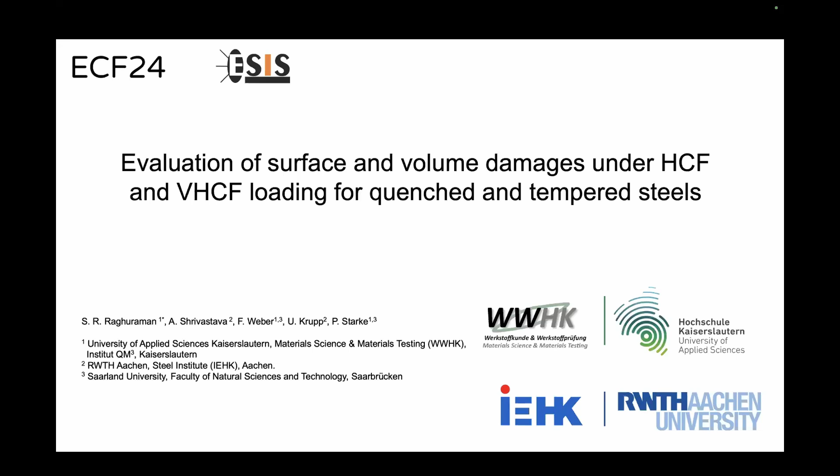Today my topic is about evaluation of surface and volume damages under HCF and VHCF loading for quenched and tempered steels. First, let me talk about the aim and the motivation behind the project.

Then I'll move on to the experimental setup and the methods that we have used. Then I'll discuss in detail about the experimental results. And at the end, I'll summarize all the points to give you an overview.

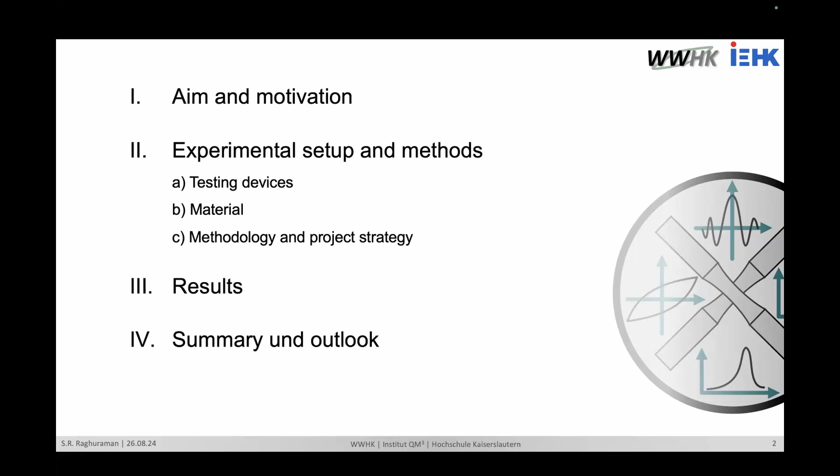According to the International Energy Agency, the steel industry is a major contributor of carbon footprint, accounting for almost 7% of global carbon dioxide emissions. Thus it is really necessary for us to promote sustainable engineering practices.

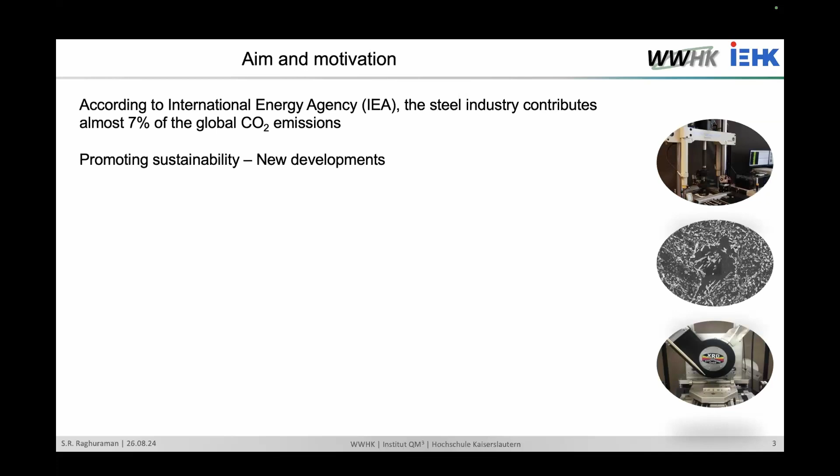We can do that by introducing new developments in material science, by developing new methods in engineering practices and so on. There are many approaches to sustainability.

This is the first model, 3R, a very classic model that we are all familiar with: reuse, reduce, and recycle.

Another similar one is circular economy. Here we are talking about slowing down the material flow by designing longer lasting products.

Next we'll move on to narrowing the material flow by using lesser material through lightweight constructions, for example. Then we'll try to avoid scrapping of materials and reintroduce it back into the material flow, thus closing the material flow.

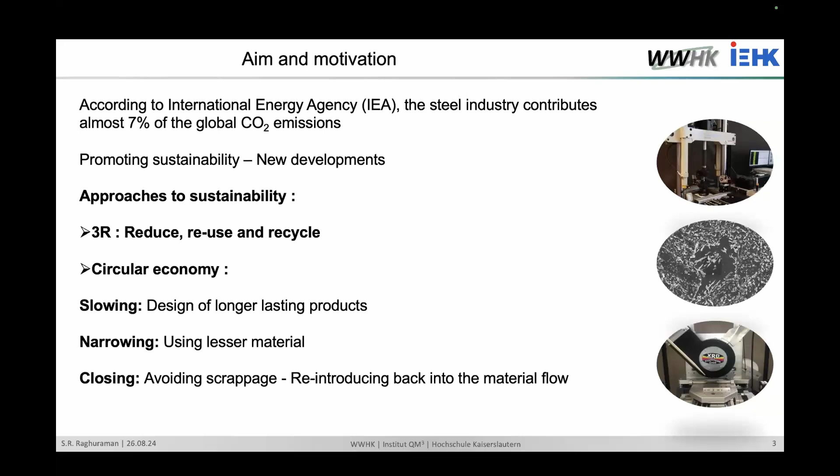So let's imagine a scenario. I have a product or a component that is partially damaged, not 100% damaged. What if I want to use it again?

What if I do not want to go through the process of melting it and then investing money, time, and energy in it, or scrapping it altogether? What if I can just reuse it? That is where reuse comes into play.

This reuse approach is an excellent opportunity for material resource management. This is very relevant for us because scrapping usually occurs even though the end of material integrity is not reached.

There's also problems with recycling. The steel industry is already saturated at 30% recycling of damaged products, and we also have economical and ecological issues, because for example accumulation of precipitates, such as copper, is an issue in recycling.

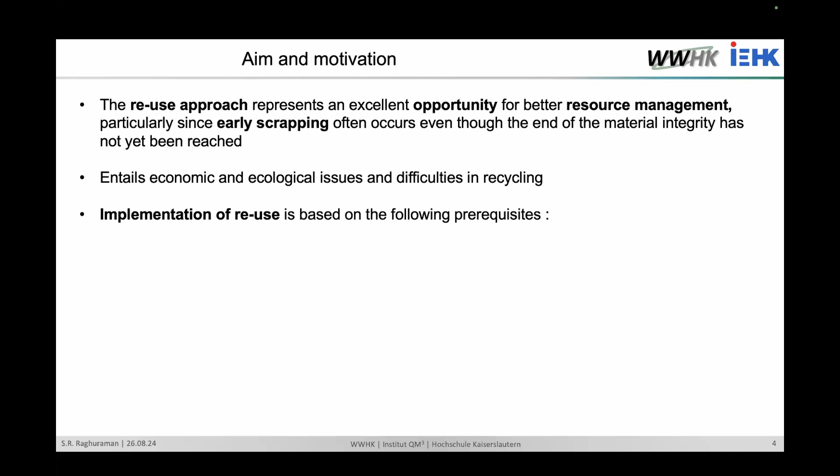So how to implement reuse? We need to take into consideration the following prerequisites: selection of relevant material areas. What is most relevant to me? Is the surface more relevant, or is the volume, for example?

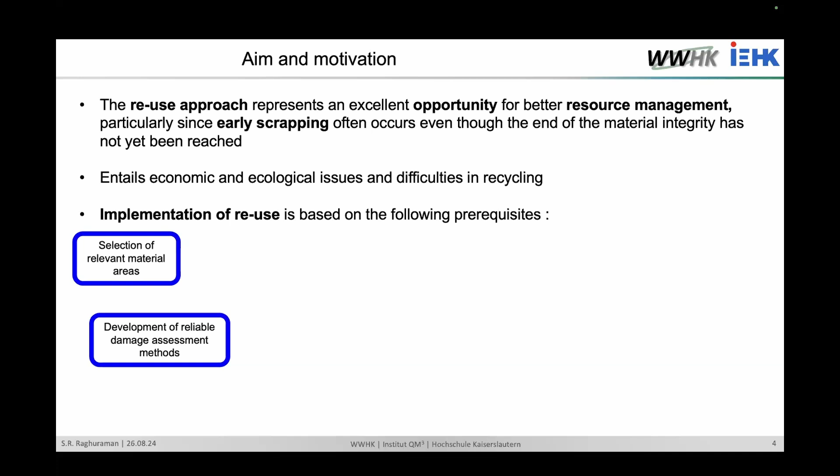Then development of reliable damage assessment methods. How much damage has occurred, and how can I make sure that the damage is there? And how can I quantify the damage?

And development of reconditioning methods. How can I remove the damage so that I can reuse it again?

And determination of reuse potential: how much lifetime I can make use of after reconditioning.

I also take into consideration the influence of size, geometry, and frequency effects, and of course the statistical models as well. I also have to take into consideration the fractography, the damage mechanisms, and crack modeling.

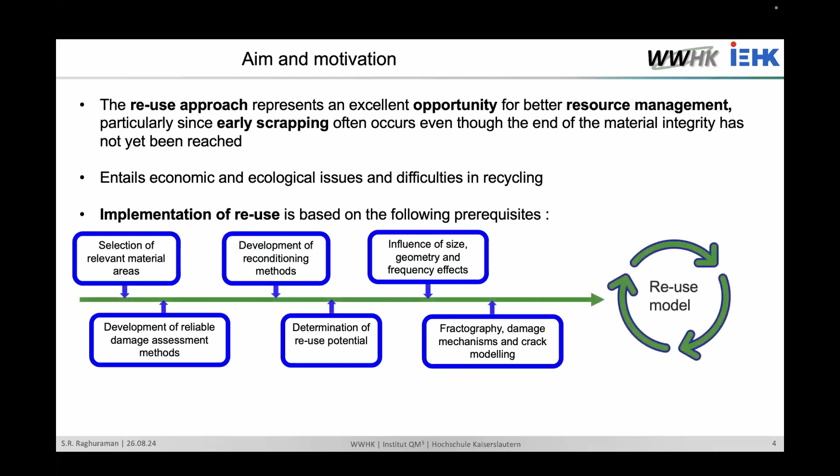What if I can put everything together in a model? This model is actually the main goal of our project: the identification and resolution of these prerequisites. We are trying to develop an encompassing model, which is our primary goal.

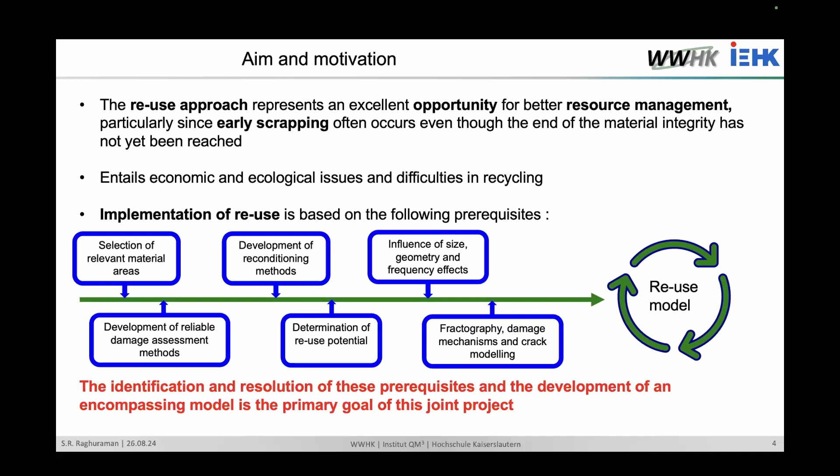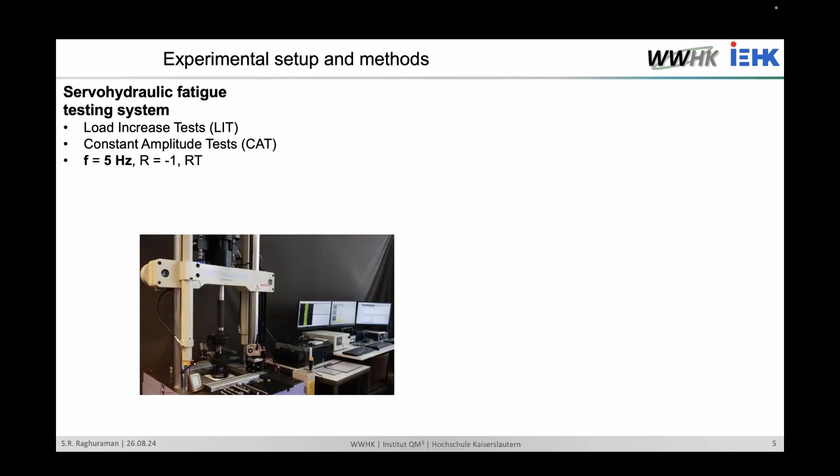For the experimental setup, we have used a servo hydraulic fatigue testing machine from Shimadzu. Here we have conducted load increase tests as well as constant amplitude tests at 5 Hertz and a load ratio of -1 at room temperature.

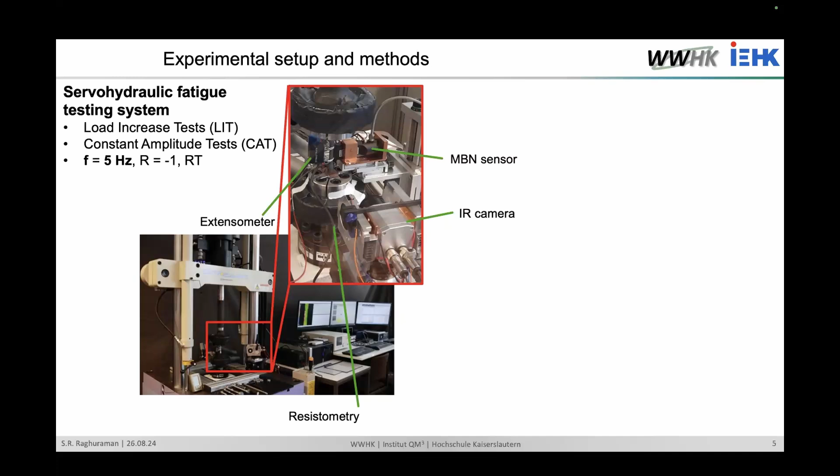To monitor the fatigue behavior during the experiments, we have used extensometer, resistometry for measuring the change in resistance, magnetic Barkhausen noise sensor for magnetic aspect, and IR camera for thermography.

For the next set of experiments, we also used a resonator from Rosenberger. Here we conducted constant amplitude tests at a load ratio of -1 at a frequency of 260 Hertz at room temperature.

The material that we have used here is quenched and tempered SAE 4140 steel. It is widely used in automobile components like crankshafts, gears, and so on.

It was heat treated at an austenitization temperature of 860 degrees Celsius, then quenched, followed by a tempering process at 550 degrees Celsius for 120 minutes. That is how we get the mechanical properties and chemical compositions listed here, tabulated here.

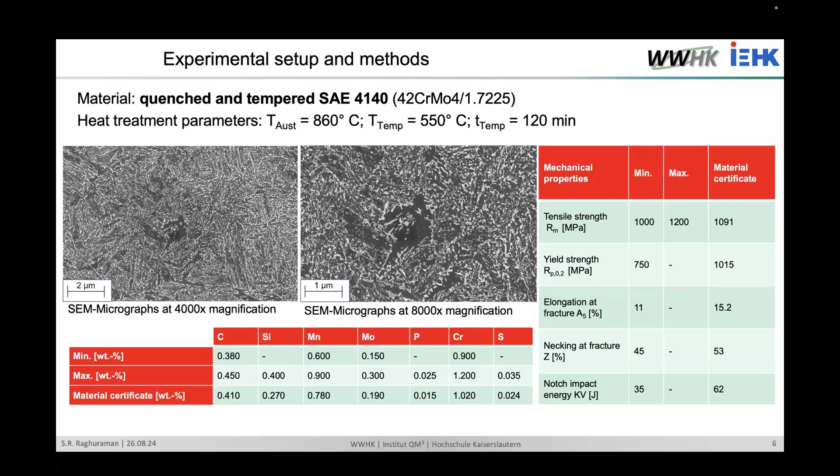The result is a very typical tempered martensite microstructure that we can see in the micrographs. So our project strategy is to start with...

...generation of the SN curve using a method called the stress-life method, and then we define the pre-damage amplitudes at the point till which I can damage it partially. Then we conduct pre-damage experiments in the HCF region until half the lifetime.

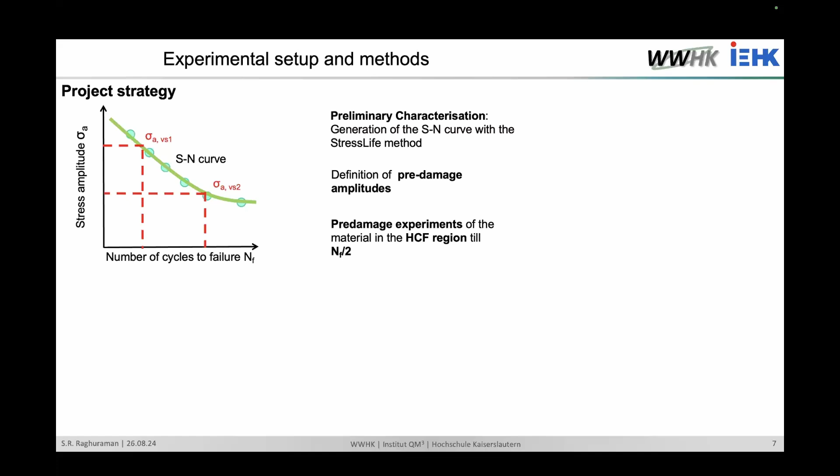After pre-damage experiments, we monitor the damage. We try to quantify the damage using NDT as well as microscopic investigations.

Then we think about reconditioning the material, that is, removing the damage that we have introduced. This is done here: the surface damage is removed by fine turning and polishing. The next step will be mixed HCF and VHCF loading of the reconditioned material.

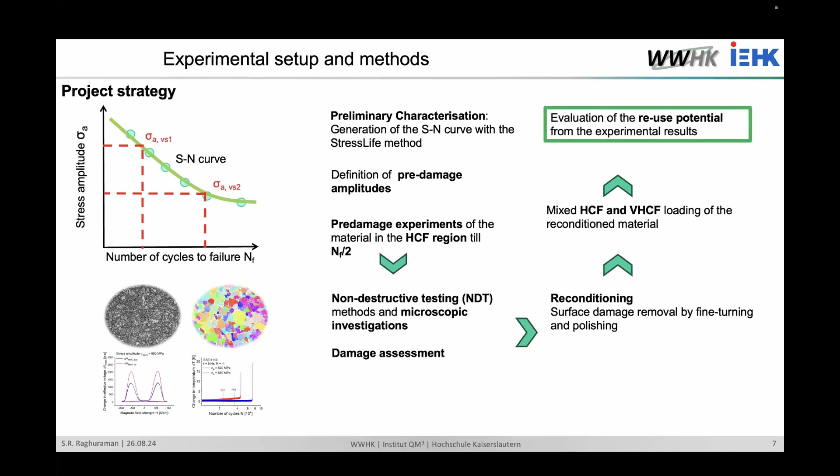At the end, we will be evaluating the reuse potential from the experimental results that we have obtained. So I talked about the stress life method. I'll go through it again very briefly.

Stress life method is implemented with a combination of Morrow, Coffin-Manson, and Basquin relationships. We'll conduct one load increase test and then two constant amplitude tests, and put the data together in a Morrow equivalent plot. Then the next step will be visualization of the material response against the number of cycles to failure. We'll take the data so far and use it to calculate further coefficients and exponents needed for calculation of the stress life curve.

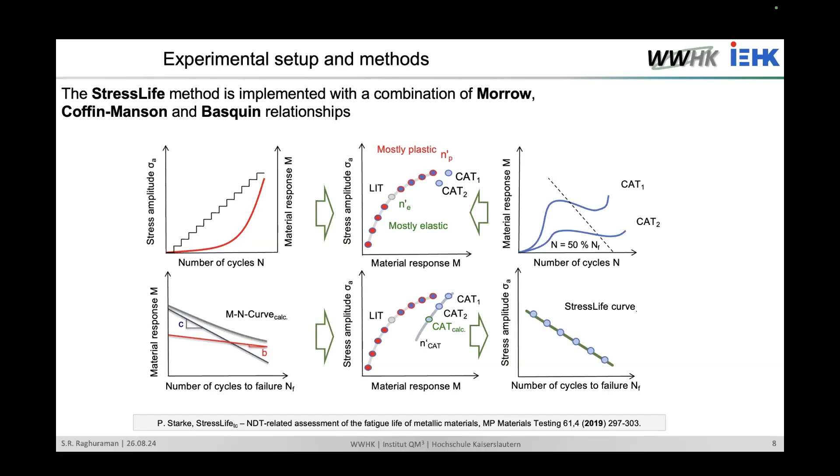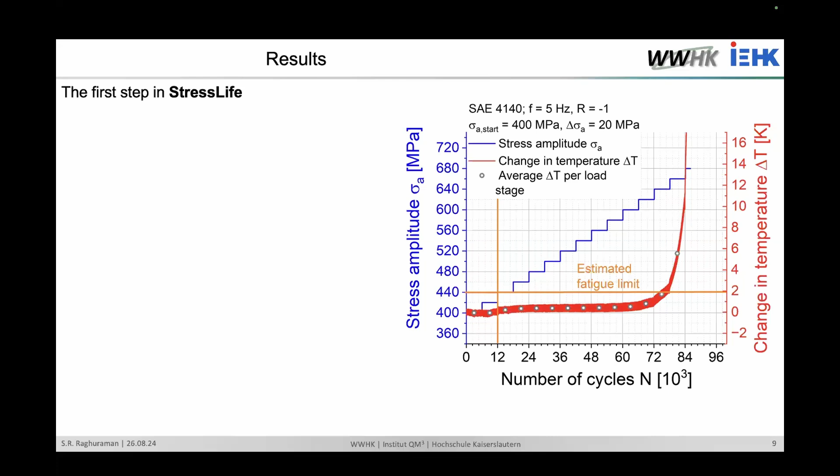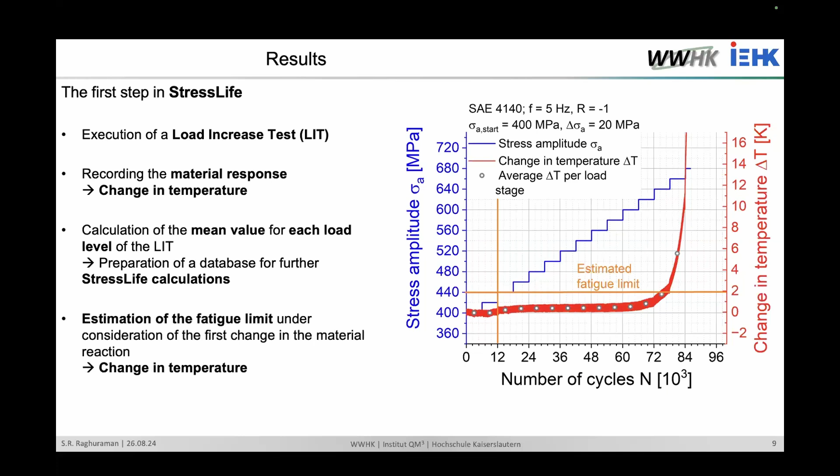The first step was to conduct a load increase test, starting at 400 megapascals and increasing 20 megapascals for each step, with a duration of 6,000 cycles per step. For simplicity, I've used thermal data to represent the cyclic deformation curves. Here we have a slight increase, the first considerable increase, which we consider an estimation of the fatigue limit. We've taken the data for each load step, and we'll use it in the steps to come.

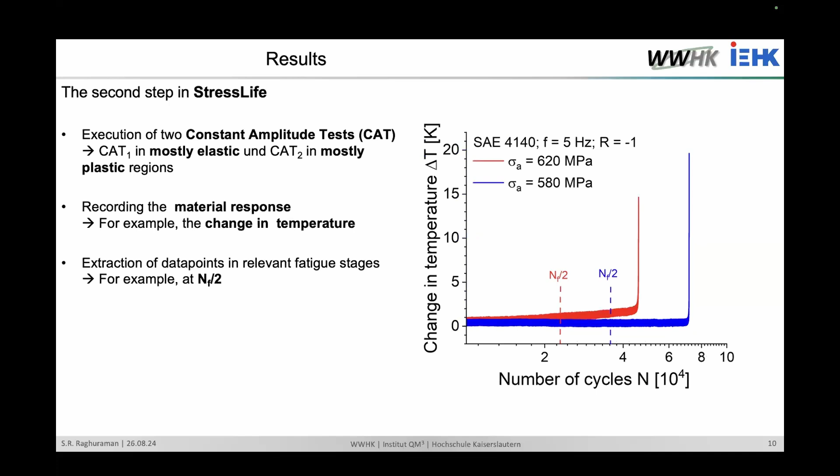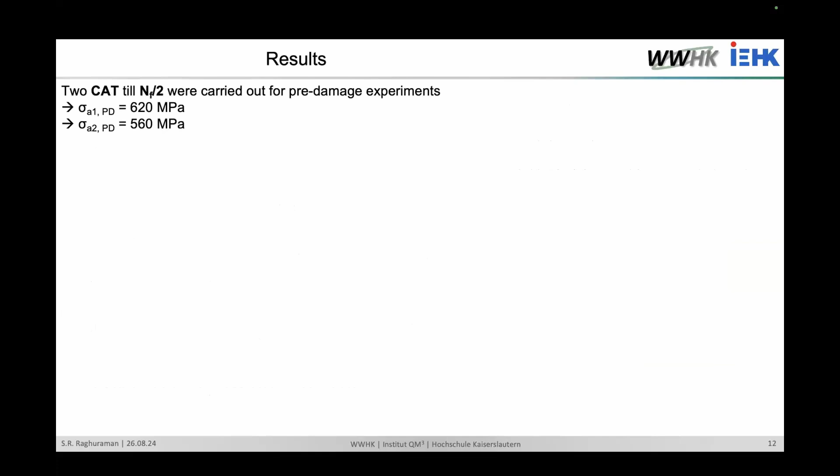So till now we have talked about the procedure. Now we'll talk about the pre-damage experiments, carried out at two stress amplitudes: one at 620 megapascals, another at 560 megapascals. The damage before and after the pre-damage experiments was also measured, in addition to other NDT with magnetic Barkhausen noise sensors.

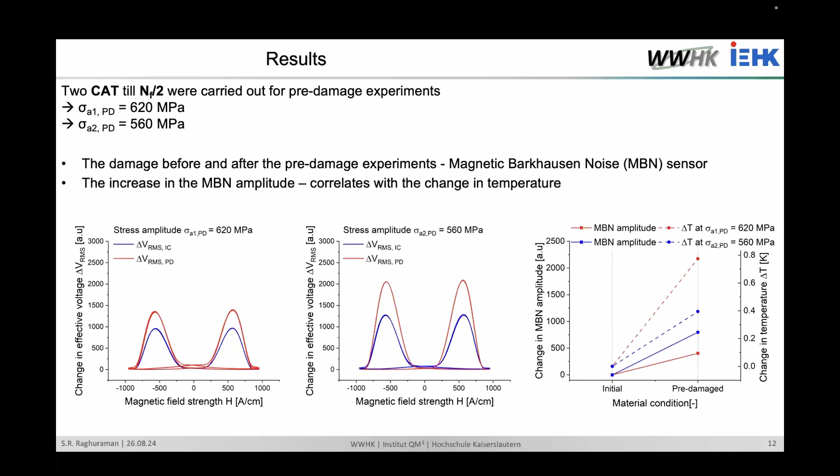Here we see the so-called butterfly curves from the Barkhausen sensor, showing the change in effective voltage plotted against magnetic field strength. The red line is for the pre-damaged condition, and the blue curve is for the initial condition. This is also reflected in the temperature curves: the initial stage and the pre-damage stage both show a proportional correlation, both showing an increase.

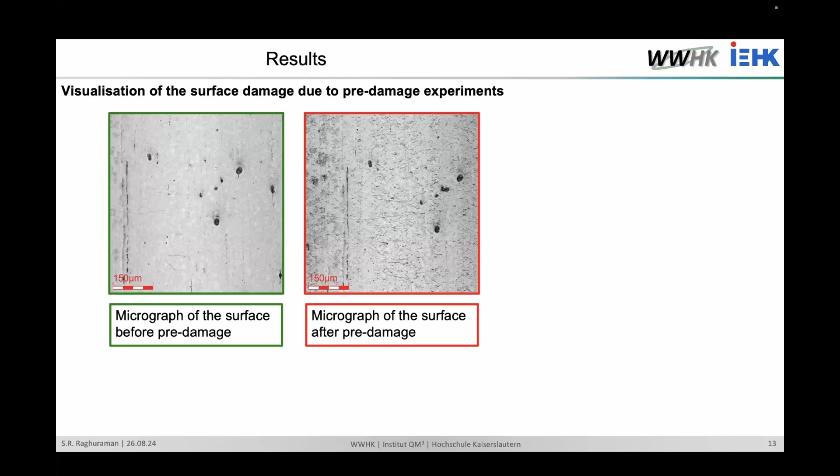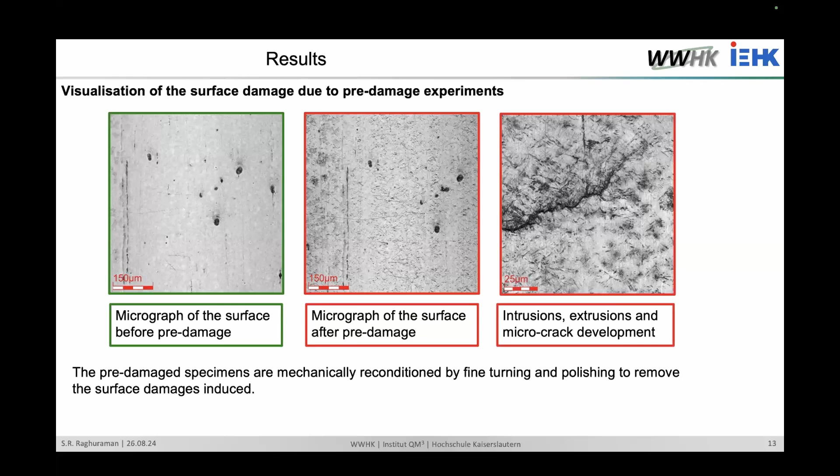Next, we also performed microscope investigations to visualize surface damage. This is the surface before pre-damage, in the initial condition, and this is the surface after pre-damage, where we noticed some microcracks developing. After these pre-damage experiments, we removed the surface damage introduced mechanically by fine turning and polishing. Now we are done with the pre-damage experiments.

Now we move to the secondary loading, done at 520 megapascals at 260 hertz, carried out on initial condition specimens as well as pre-damage specimens, to have a reference. Here we have a graph showing number of cycles plotted against material condition. The green dots represent specimens in initial condition without any pre-damage. The second set, with red rectangles, shows pre-damage specimens at 620 megapascals, and the third shows pre-damage specimens at 560 megapascals.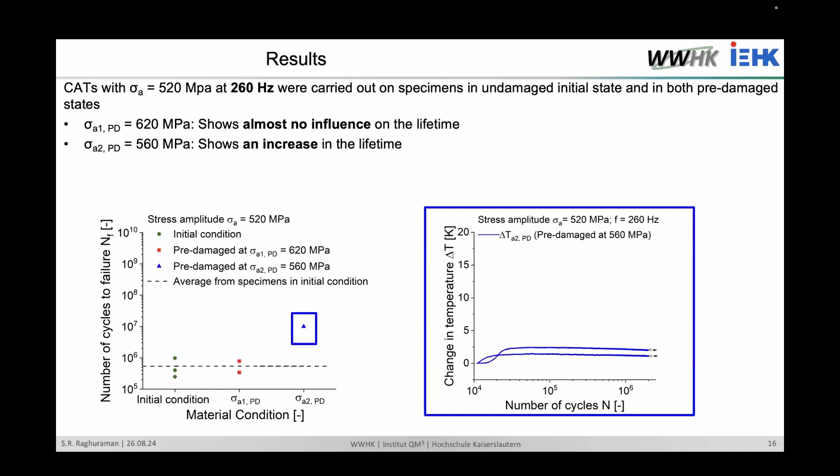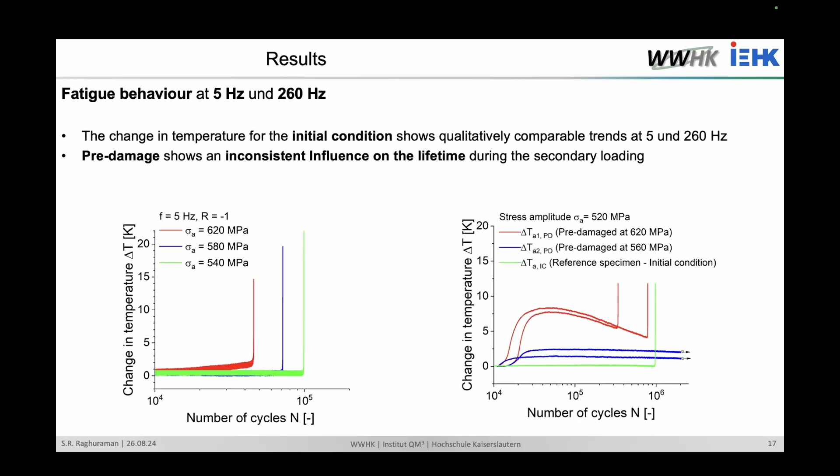We also tried to compare the difference between experiments at 5 hertz and 260 hertz—this is not a direct comparison, just for representation. You can see the initial condition specimens have a very comparable output, while the specimens at 620 megapascals show a different trend, as do those with the blue lines, which are preloaded at 560 megapascals.

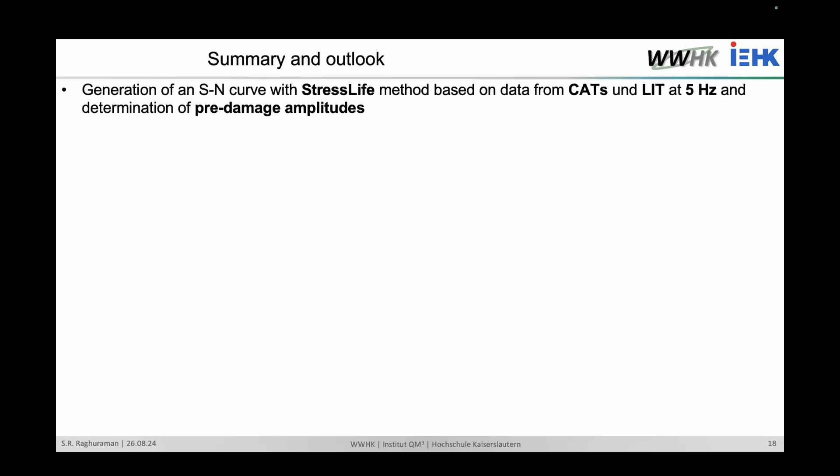To summarize: we started with generation of S-N curves, and through that determined the pre-damage amplitudes and the extent of pre-damage to introduce to the specimens. Then we carried out the pre-damage experiments till half of the lifetime, and assessed the damage introduced onto the specimens. Then we loaded the steel a second time at 260 hertz.

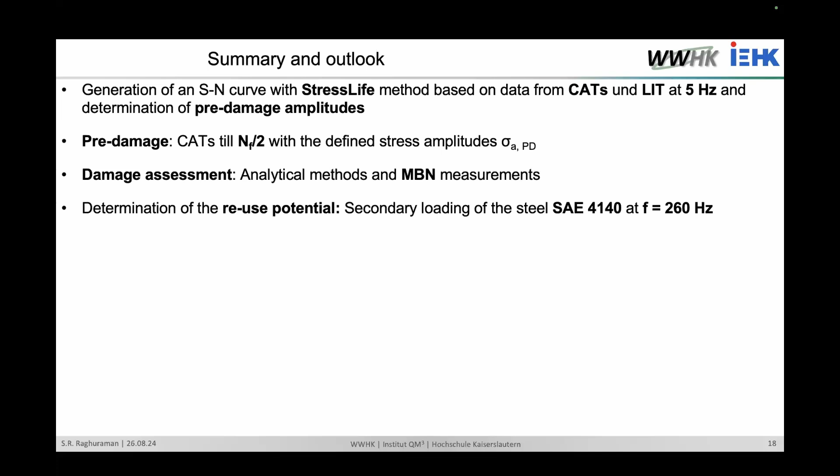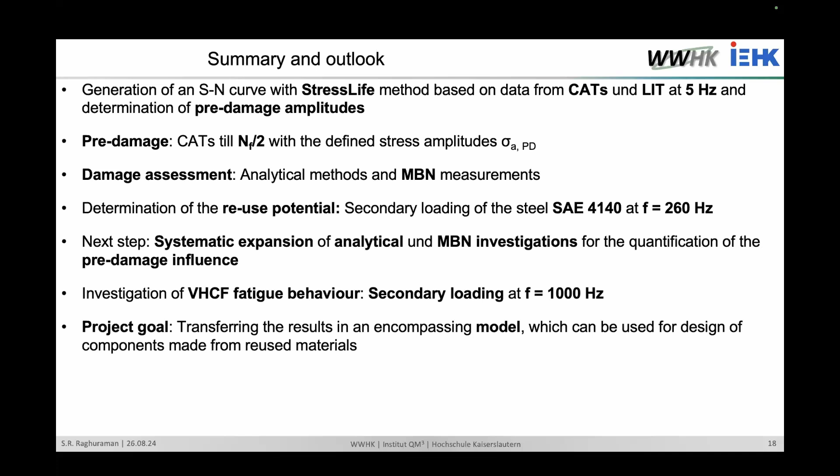In the future, we plan to systematically expand our analytical and Barkhausen noise investigations for better quantification of the pre-damage influence. We also plan to do secondary loading in the VHCF region at 1000 hertz. Our project goal is ultimately to transfer all the data we've obtained into an overarching model that can be used for design of components made from reused materials.